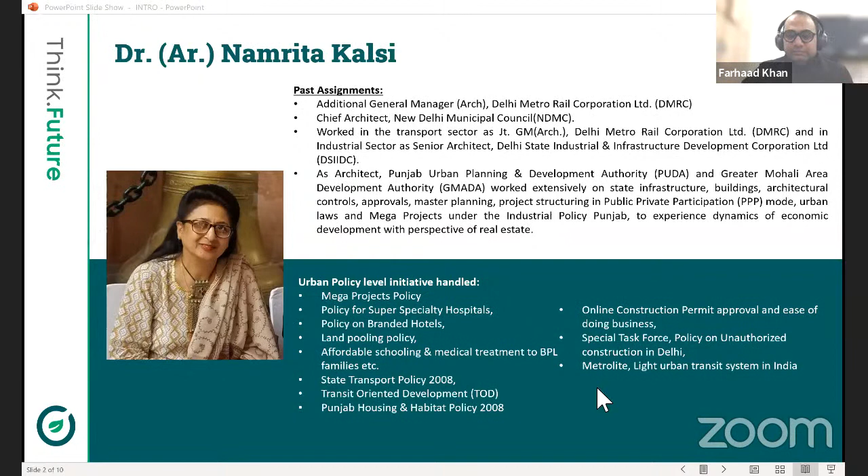Farhad, can I share the screen? Sure, ma'am, let me just share it. How do I convert into PPT mode, because my screen is not visible? Is there a command for that? F5, F5. Okay.

Thank you. Good afternoon, everybody. We are today covering leverage technology to design energy efficient buildings, an event organized by WinZero and Capricorn Technologies. Here I'm sharing the journey so far by Capricorn, which was formed by the merger of 4 companies, and it's evolving into RIB, and then further taking a step forward to get it to WinZero.

Now, what is WinZero? Before going to that, let's understand that Capricorn is India's leading design and construction management technology and solution provider for architecture, engineering, and construction. Their vision is to help customers unleash ideas to create a better world, with an end-to-end strategy and 360-degree technology solutions to customers through product sales. They have 20,000 plus customers and more than 250-300 staff.

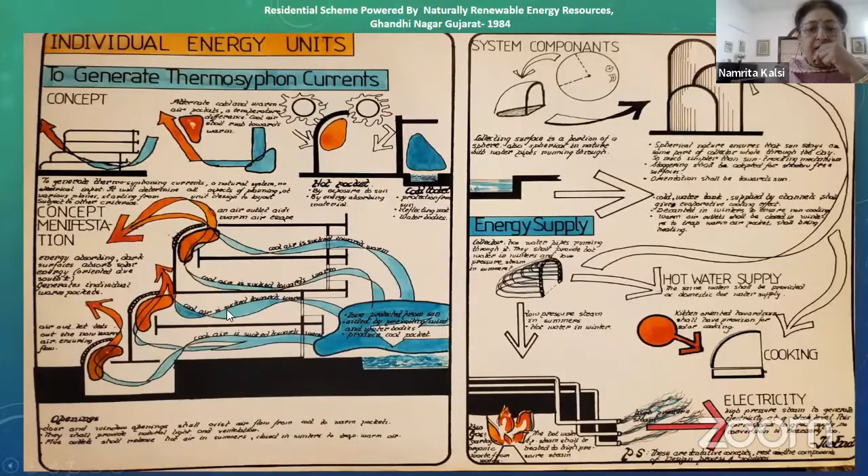This thesis looked more at sustainable solutions like hot water supply, cooking electricity through energy, as well as generating thermosyphon currents. As I see down the lane, these things are still relevant for rural sustainability in terms of solar cooking, biogas, evaporative cooling, solar water heater, and probably agriculture sustainability.

But when it comes to urban outlook, the thing is a different story, because the energy requirement and energy spent in urban areas is far larger. It takes a piece of cake. So some of the technologies which have to be looked at as far as urban areas are concerned is nanotechnology.

Nanotechnology mainly consists of the processing of separation, consolidation, and deformation of material by one atom or molecule. At present, many of the tiles available in the industry are coated with nanomaterials, and we find it very good. But these can also be leveraged to upgrade previous technologies by having multi-junction solar cells, quantum dot solar cells, nano paints, nano printables.

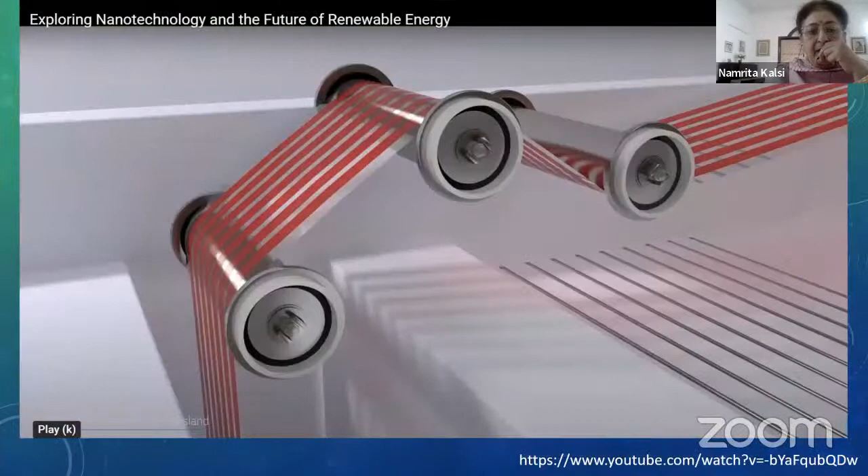As far as battery or storage is concerned, coating with active material for energy density, and next generation lithium batteries, and then even converting bricks into energy generation.

With this, I come to one of our speakers, architect Britta Knobel-Gupta, who was born in Stuttgart, Germany.

She will be sharing with us their experiences. Britta pursued her architectural study in Constance, Germany, and Lyon, France. She received a scholarship in 2004 to study MArch in Architecture and Urbanism, DRL, from the Architectural Association School of Architecture, London. In 2006, she joined Zaha Hadid Architects and was involved in a number of seminal projects as lead project architect, which achieved international acclaim: Abu Dhabi Performing Arts Center, Broad Art Museum in Michigan, and Dubai Opera House. She is also a professor at various architectural schools in Britain and Germany.

Her design philosophy fuses sustainability and computational optimization to create smarter, more ecologically sound solutions, blurring the lines between landscape and architecture and allowing nature to permeate within the built, which is a defining feature of her practice and can be reflected in her work.

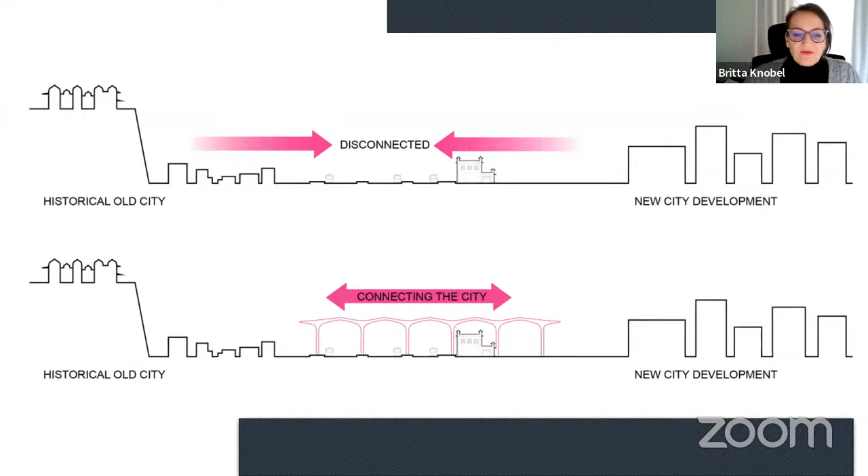So out of an urban perspective, we have the railway disconnected the city, the historic city and the new city development. So here with the station building, we really had a chance to connect the city again, which we of course wanted to use this opportunity to join both sides of the city again.

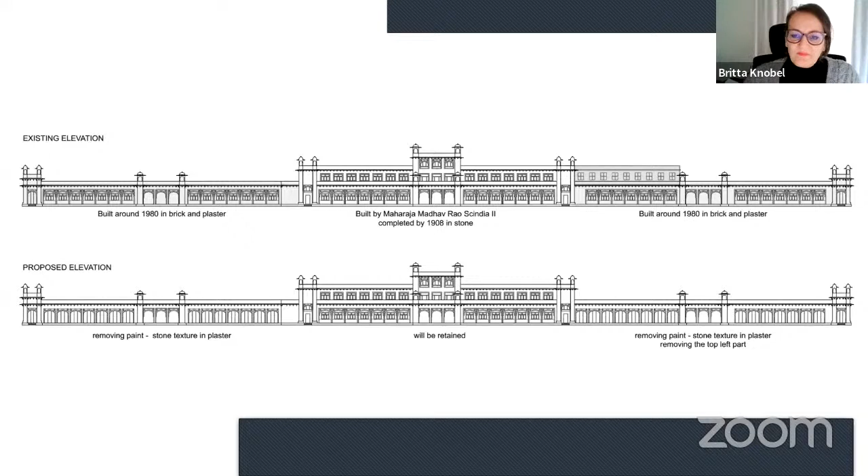So this is the existing building in the middle, 1908 in stone, and then they added later on these two wings on both sides, left and right, in the 1980s in brick and plaster, and they painted it. So for us, in terms of adaptive reuse, we decided to maintain the existing structure, reuse it, renovate it, and then flank it with the new departure and arrival terminal, which is a requirement from the Indian Railway to separate the flows from departure and arrival.

So we have a very clear distinction, a very visible terminal, departure and arrival. So it's very clear for passengers to know where to go. Same logic as any airport has to really separate the flows. And by adding these two terminals, departure and arrival, on both sides, we are flanking it and giving more appreciation again to the existing structure in the middle.

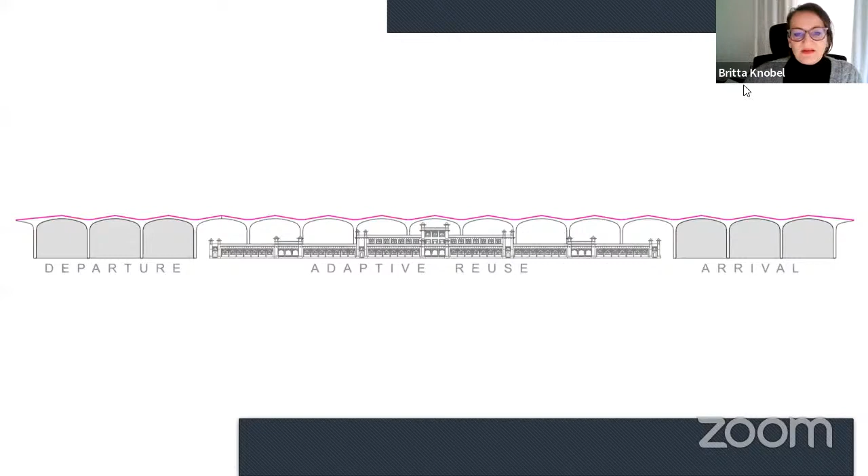So out of a two-dimensional structural system, which we found in the existing station, these arches, which was the most prominent architectural element around in this project, we were really trying to use this two-dimensional arch and develop it into a three-dimensional structural system.

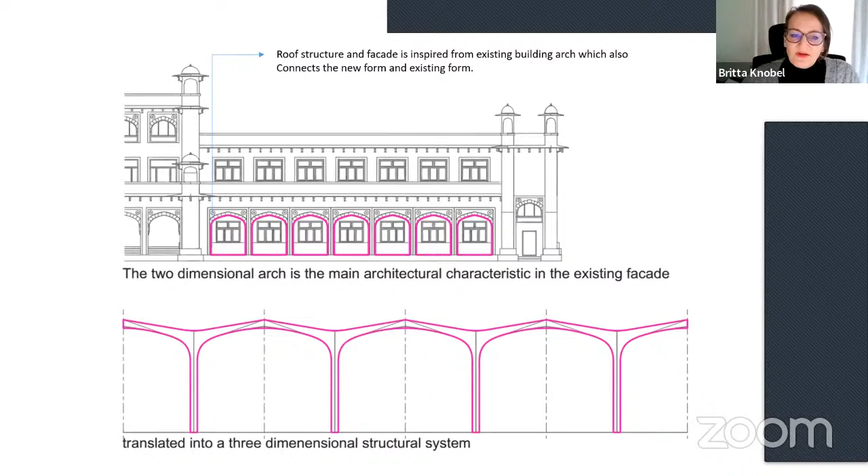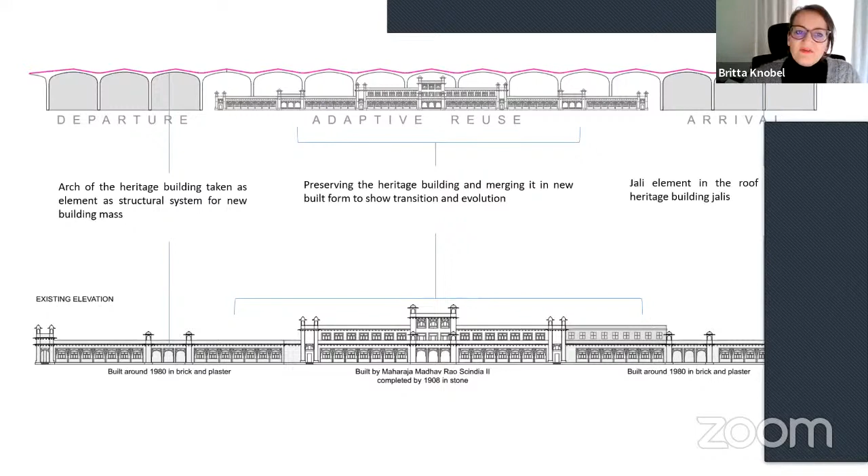How we designed it with this structural system, we designed the departure and arrival terminal and also the covering of the platform, which you see in the background of the existing structure.

This is the structural system with, of course, because we cannot shut down a running station, the columns have an in-situ foundation, but then the columns will be prefabricated, the truss systems, the slabs will be prefabricated, structural roof system will be prefabricated and built up as soon as possible with a running station in the background.

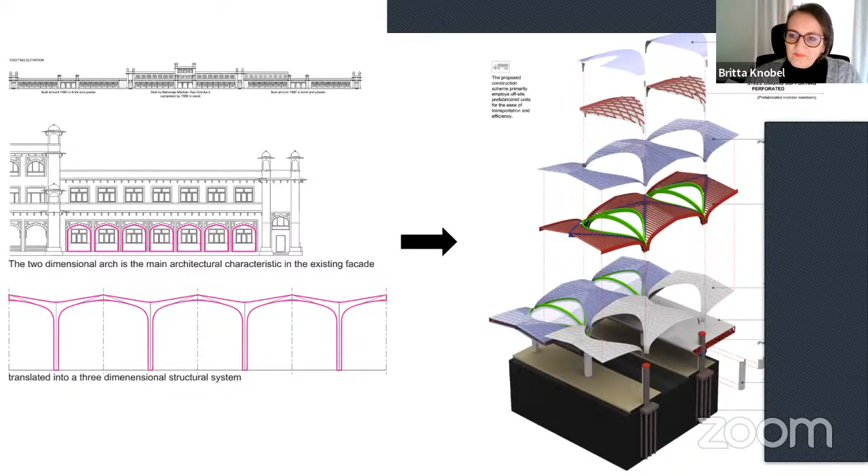It's a three-dimensional structural system where we added these eyes into it, with also a 'jali' to get some natural lighting into the platforms, and of course also to reduce the energy. It's also animating the space. We actually got the clue for this jali from the existing windows of the station, so we took that pattern and added it into the terminal project.

This is the extent of a railway project now, which the Indian Railway is doing a lot of in India. It's a whole master plan where, in the surrounding areas, we're adding residential, commercial, mixed use, various different programs which they will sell or lease out. At the bottom you see the new proposed station building.

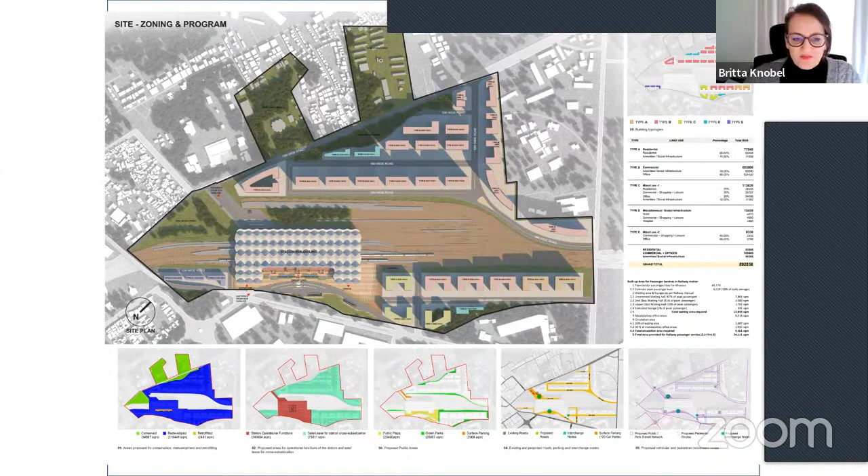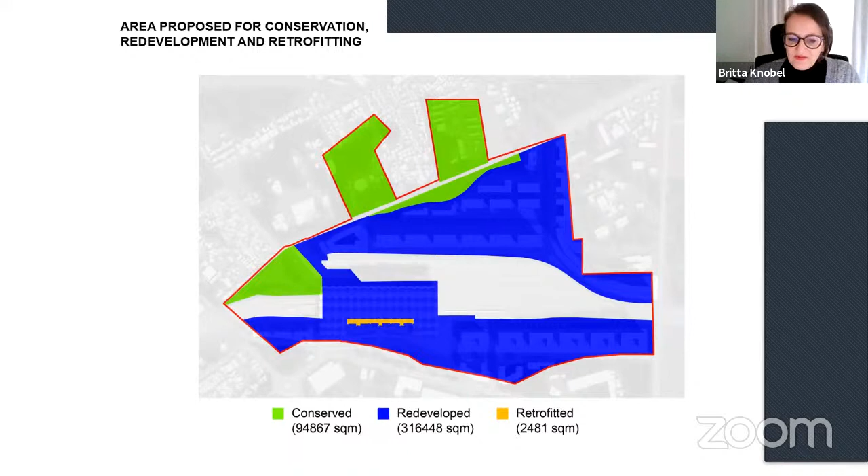Partly this master plan will of course be conserved. Some green areas will be conserved. Some areas, marked in blue, will be redeveloped. In this case, because we are retaining the station, we are retrofitting it, so we also have a retrofitting element.

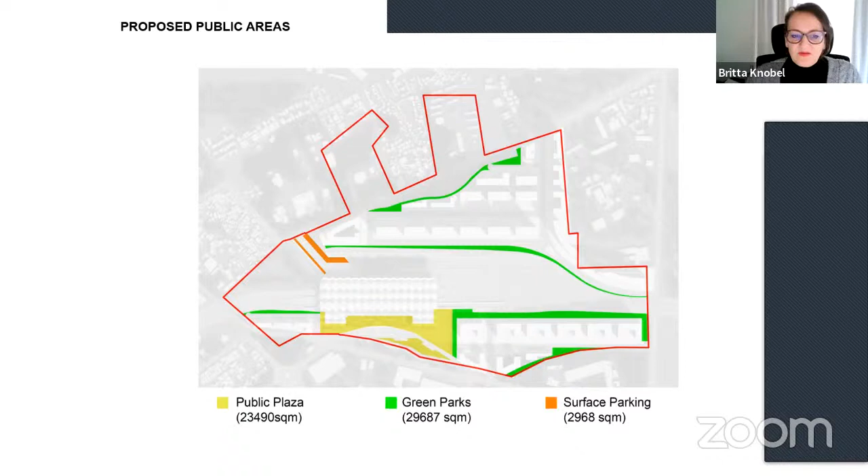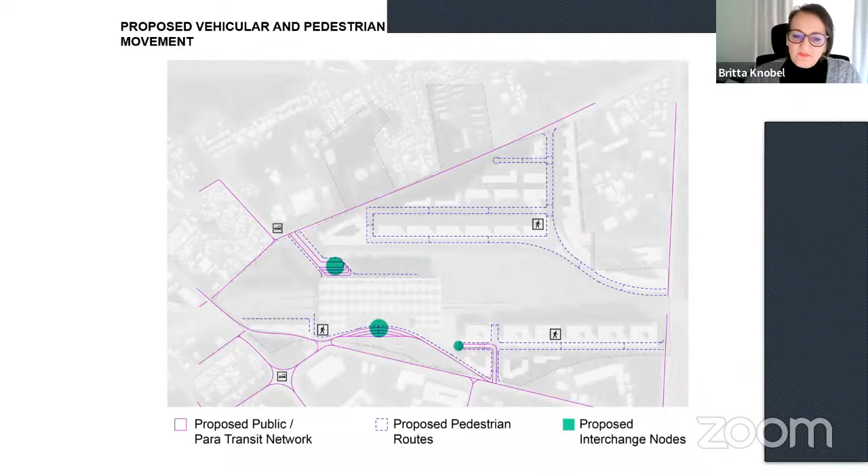This green area goes into sale and lease - some public plaza, some green parks for residents, commercial lotting, surface parking. This is the new road network and the new drop-offs, and also the proposed interchange nodes for various other modes of transportation.

The proposed road network and interchange nodes. Here you see again what I just mentioned, the various programs of commercial, residential, mixed use, which we are adding into the master plan to make it also viable for the Indian Railway.

The top view - we have a drop-off on the back side and on the front side, so two drop-offs when you come from any direction. You can use the closer drop-off, and from each drop-off you can enter departure and arrival separately. So it's never blending together - it's always separated, these flows.

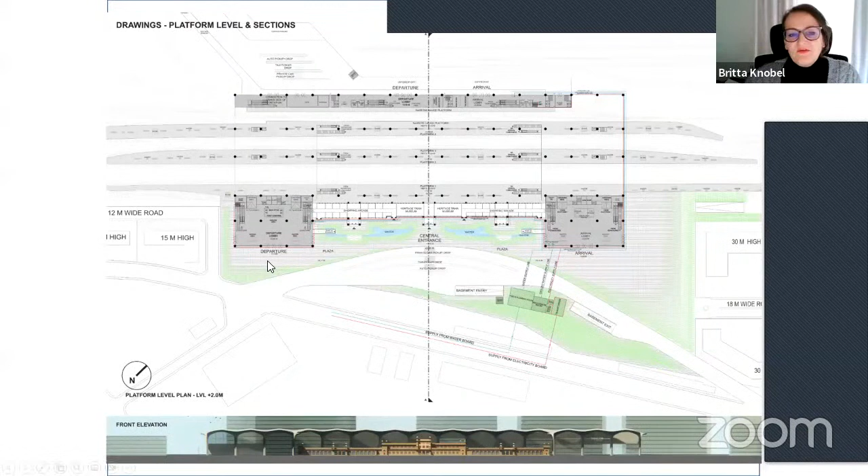This is the main ground floor drawing. If I zoom in, you arrive at departure, you buy your ticket, then you go up with the escalator or staircase to the concourse level. From there you can wait for your train, have a snack, have a coffee. You wait for your train to come, then go down the steps or escalator, or for handicapped people, there's a lift. So this is the logic - the flow is completely separated, arrival and departure, also very clearly visible from outside.

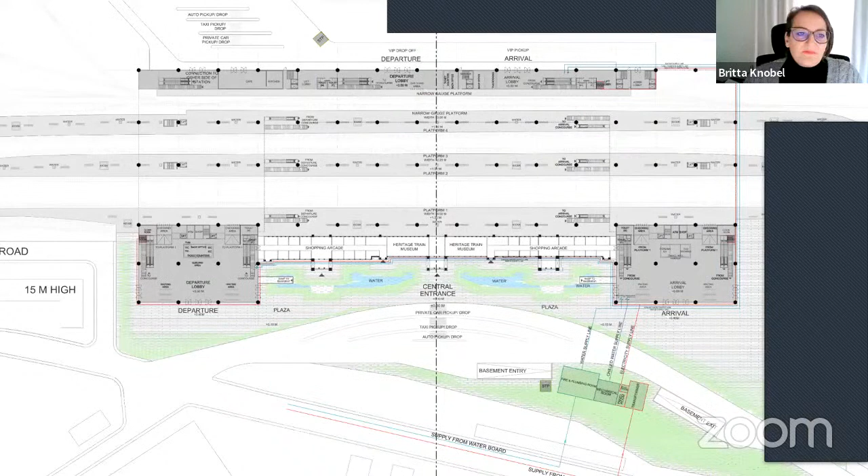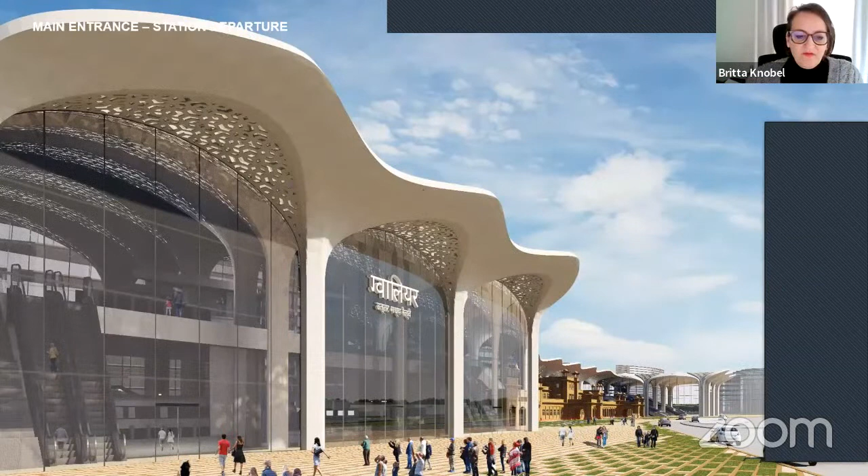I will show you the concourse level in a minute. So this is again the drop-off view, a view into the departure terminal, and on the right side you see the arrival terminal. This is the departure - you arrive, buy a ticket, then go up to the concourse level where you can relax and wait for your train.

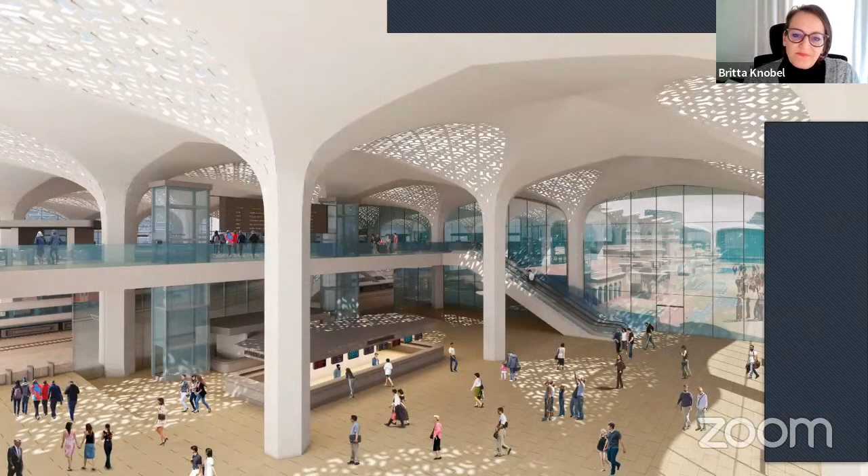You see here, these jalis give you some natural light, and here you see better - it's also animating the space because during the day it will move and animate the space. It gives a very nice differentiation to the space. And you see in the drop-off here, in the background, the original station on the left.

A view down from the concourse level after you've relaxed, when your train is approaching. Here you can go down with the staircase or the escalator into this large space. What I want to mention is, of course, the platforms are not in a regular grid, so the structural system is in some parts longer, in some parts smaller - the left platform is closer, the right one further. So it's a structural system which we developed that can be applied to these various platform depths.

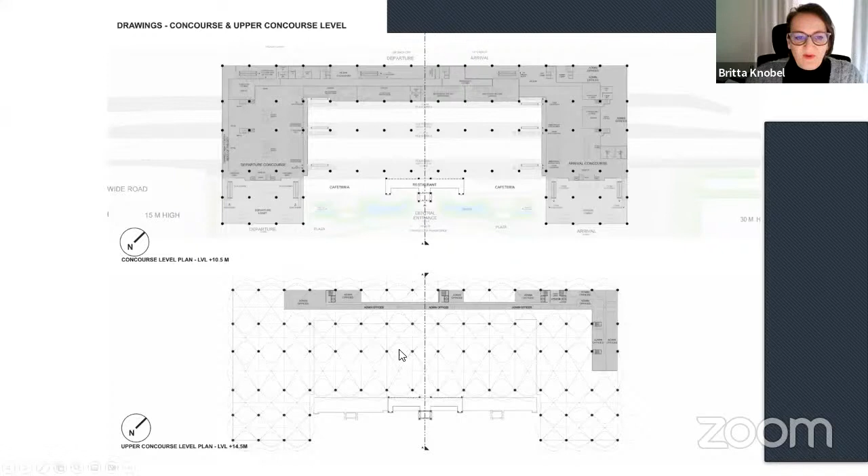So this is the concourse level in the roof plan. When you arrive in the concourse level, you have, of course, the possibility for waiting areas. You can have some refreshments, retail, and then there are some VIP lounges, some restaurants to make your journey a little bit more easy and relaxed.

And then here on the left, you see this corridor. Anyway, in reality this connection connects the old part of the city with the new part of the city. So this is the connection which we created as a possibility to reconnect the city.

The existing station building will be used on the ground floor as a small museum and shopping arcades, and on the first floor, as you can see, as a restaurant, where we are using these existing balconies.

When you arrive, it's the same logic. You go up to the concourse level, you can wait for your next train, or maybe you just want to leave. Then you go down, escalator or staircase, and you can go back to the drop-off and get picked up with your cab, car, or bus.

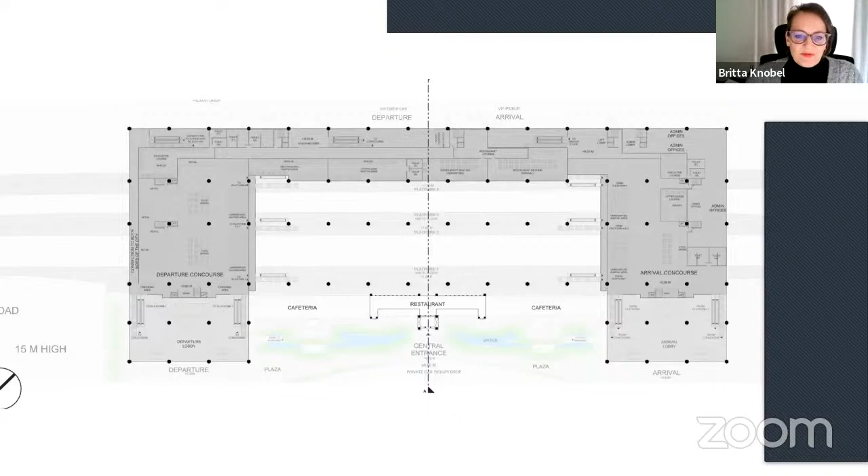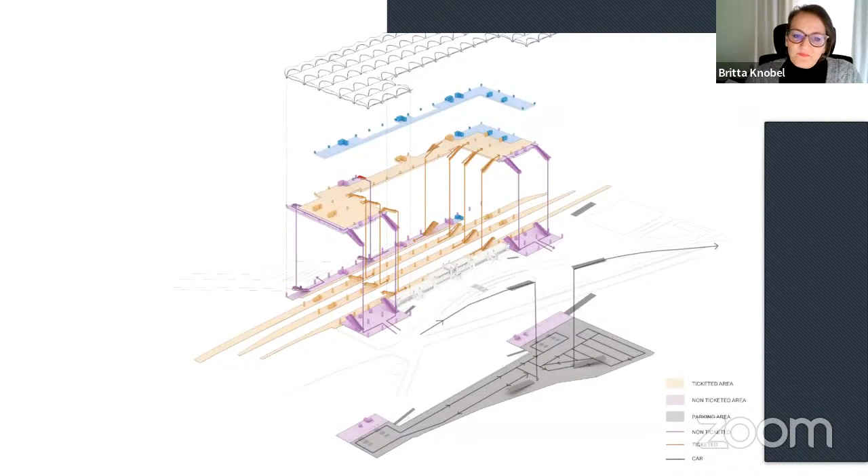This is the view of the concourse level down into the platforms. Here you see the ticketed area, non-ticketed in purple and ticketed in orange. So after some point it is ticketed, and the lobby is non-ticketed.

This is some more fire escape and vertical transportation. This is again the structural system, and you see here in the middle the framing plan with different grids. Because of the existing platforms, we have a different grid which the structural system can manage.

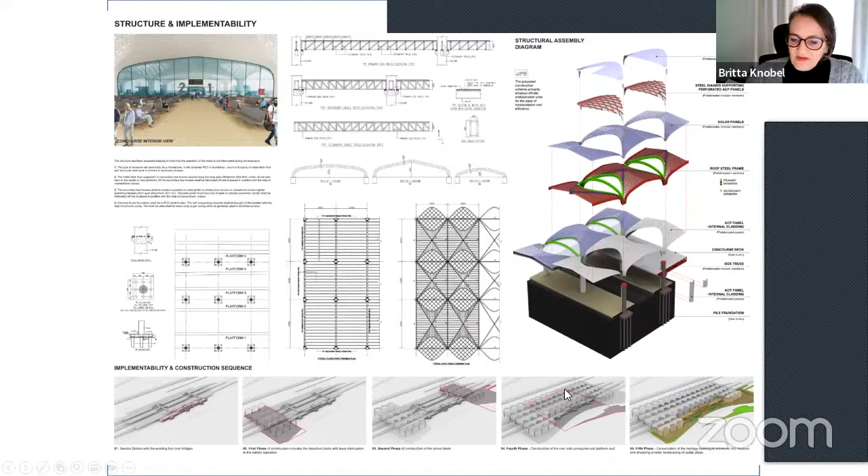We are proposing to do it in stages: first the departure terminal, then the arrival terminal, and then the central area where the renovation and drop-off will be going on. It's all prefabricated, so it will be quick to install, as quick as possible.

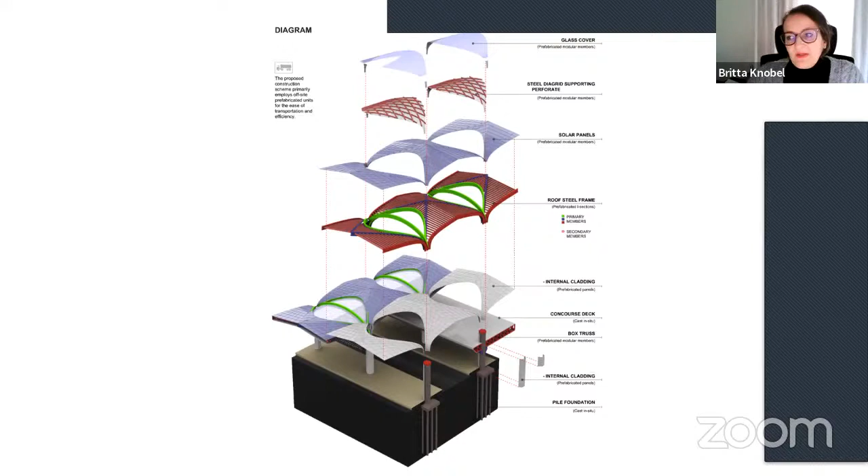We are also proposing on this roof, because it's a very large area, it's ideal to put photovoltaic cells on the roof. So we are proposing photovoltaic cells to also make it net zero, maybe even net positive.

So this is the structural system. You see here 32, 25, 28 - it varies depending on the platforms.

This is a small movie.

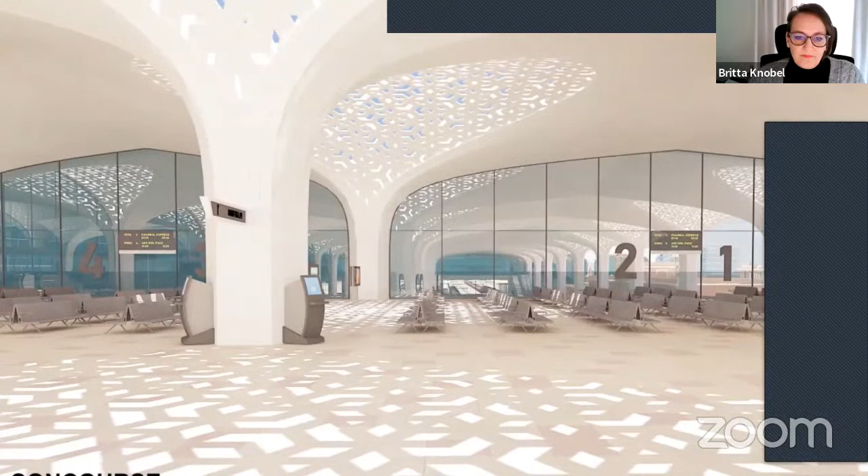So this was an international competition which we won. This is actually the panel which we gave for submission when we presented the project.

We have various elements besides the photovoltaic on the roof. We are proposing natural ventilation, passive cooling, some misting, and water saving fixtures. Also, an interesting element is piezoelectricity on the plaza - these are tiles which create energy, an active slab. So you see, we have various elements to make it really a net zero project.

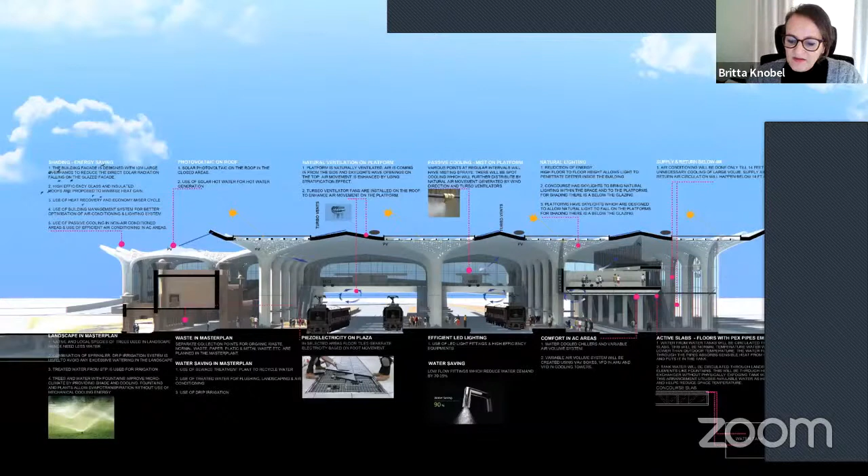This is the overview of the whole master plan.

We would like to show you one more project, which is much smaller and also looks at sustainability in very global and very large ways under a very large umbrella. Here we are looking at the climate, responsiveness to the climate, and also locally sourced materials.

What is very special, I think, is that we are nesting villas within the earth to use the earth cooling. We are reducing direct heat gain by doing that, and also using the wind movement to cool the spaces. So I want to quickly run you through this.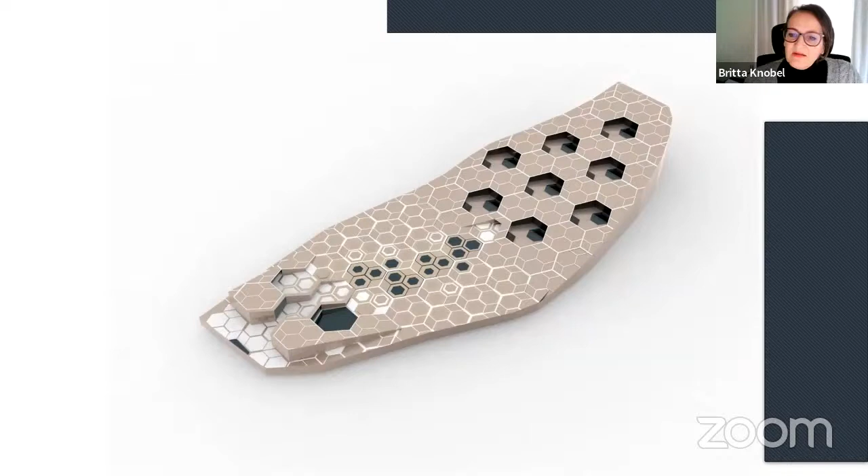Additionally, it gives us very private and introverted courtyards. You feel private in your own cottage, which is important - nobody looks into it. You have your private space, which you can enjoy.

On the left, we have the drop-off. There we have some buildings like a restaurant, all-day dining, and a reception area. Then we have a swimming pool.

Then you walk over the central area, which also has some water elements to cool down, using evaporative cooling. And on the right side, you see the villas nested in nature.

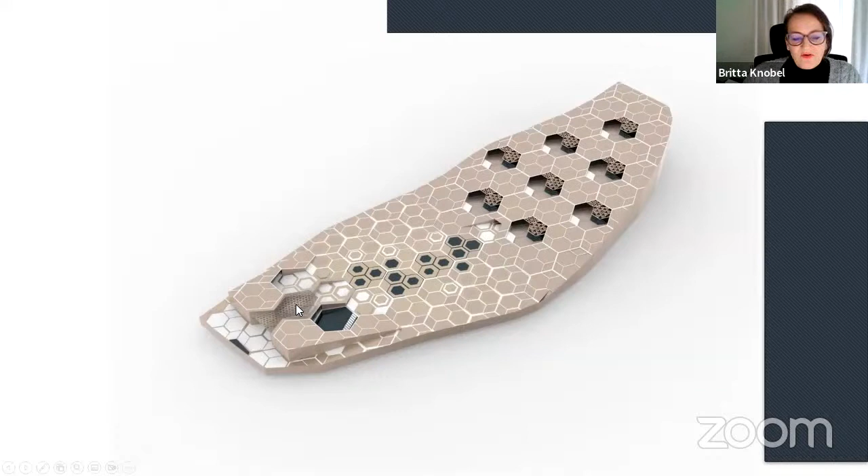On the left, after you drop off, you also have shading because it's extremely hot. Actually, the wind flows in this direction, so it also helps us - we channel the wind, it goes over the water bodies, and then blows over the cottages. By using these jaalis, we're actually getting the wind inside the courtyards, which I'll show you in a second.

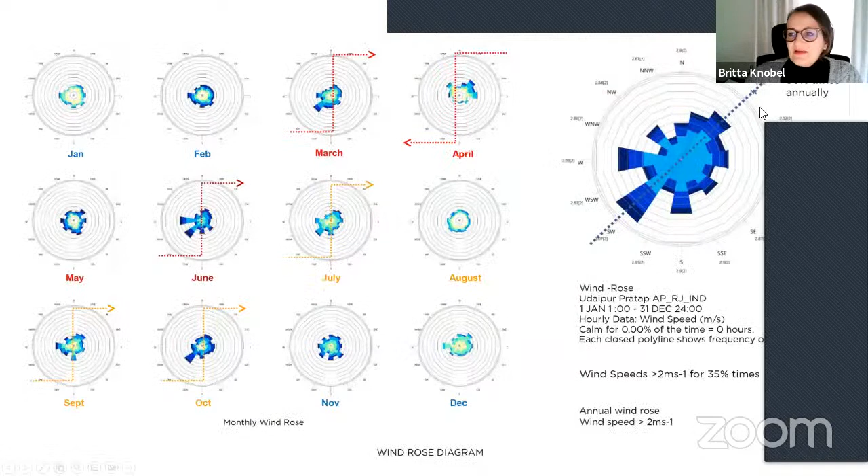Of course, we are also using these jaalis to shade the courtyard, or partially at least. This is the wind direction - luckily it just goes linear over the site, so we're using this wind direction.

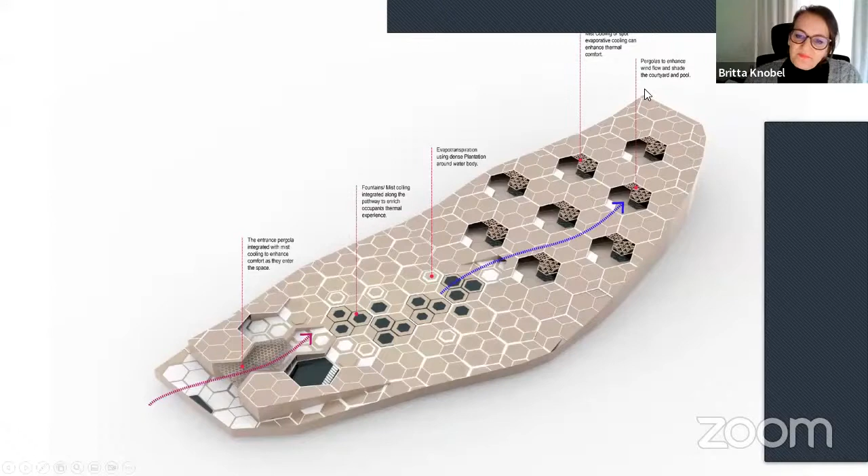I'll just show you this in a diagram. This is the view of the entrance of the cottages.

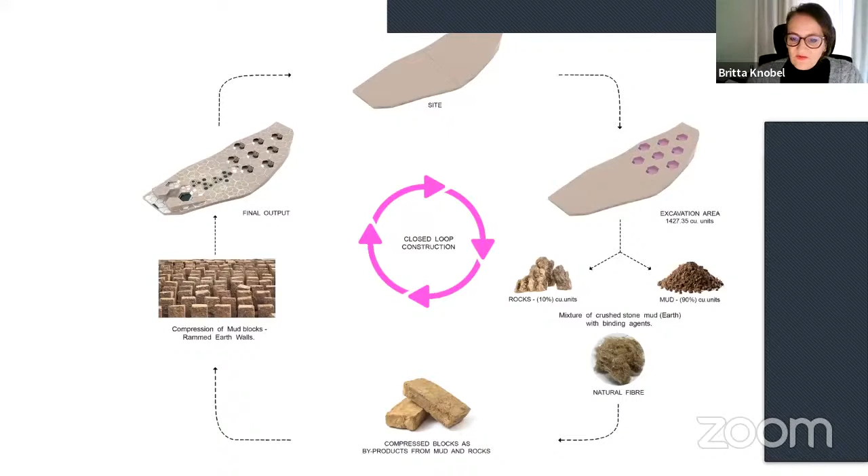So we have these 9 cottages. What is also important for us is to look at the closed loop construction, using whatever we get from the site. Here, the excavation mud is used to make mud bricks. This is a very important point in sustainability.

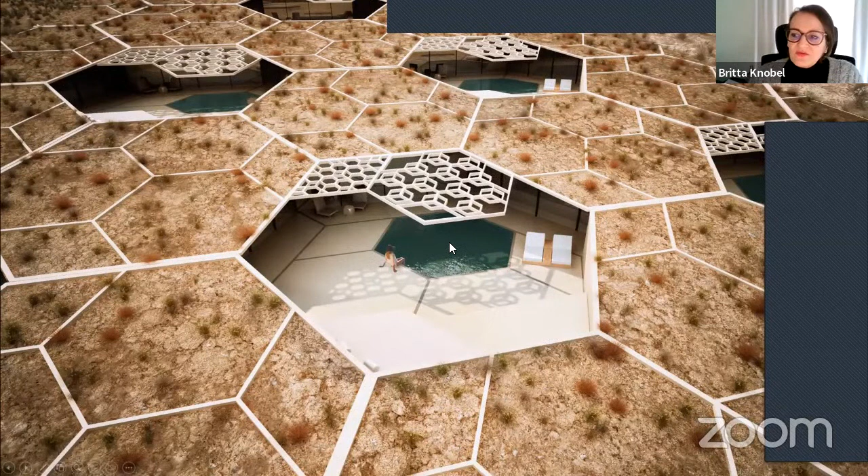This is a close-up view of these nested, cocooned villas with a day bed, and a close-up with a little pool and shading. This jaali was quite important to us because it has two roles: it provides shading, and it also lets the wind go in. Because of the inclination, it enhances the wind flow and brings it inside the cottage to reduce heat gain and cool it down a little more.

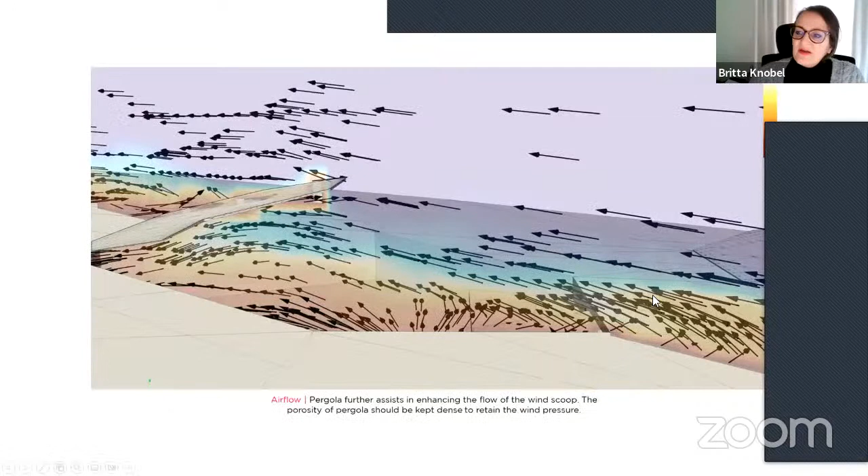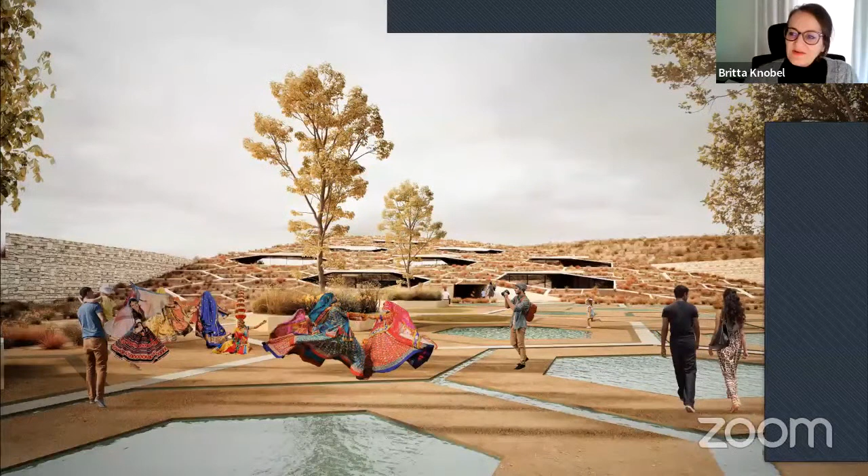With this, I would like to thank you very much for inviting me. I'm very much looking forward to your questions.

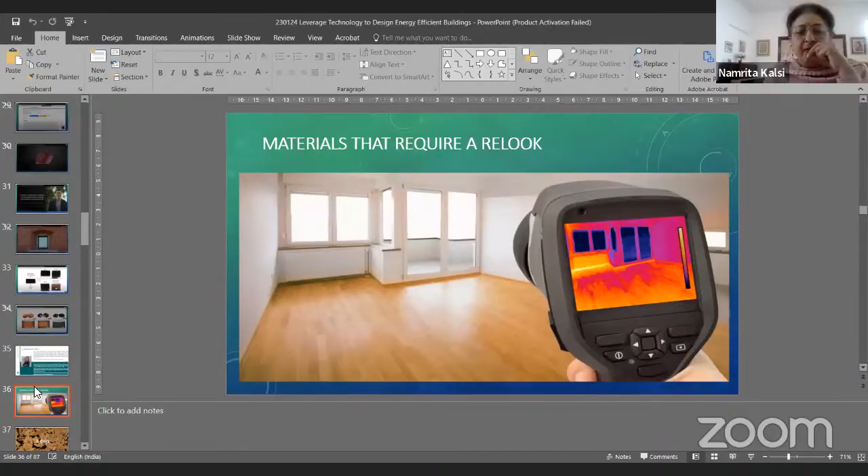Before that, that is Mili. Before that, Just a sec.

I would just like to remind my audience that some of the materials which we have thrown into the history dustbin, but which need to be resurrected for better sustainability, are cork, coffee husk, newspaper wood, mycelium, alga, recycled diapers, cob, plastic bricks, polyurethane, plant-based foam, and seaweed.

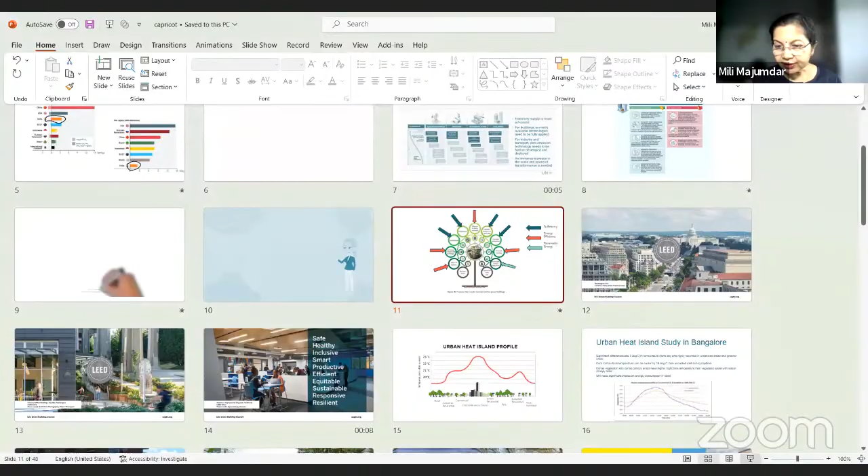In this respect, let me share my screen to talk about a few things. I know we are pressed for time, but I've just pulled up the presentation, and I'll go from the middle since we are pressed for time.

When we look at a sustainable or energy efficient building, we look at multiple things, not just one thing. For example, to make an envelope energy efficient, we have to look at passive design, which includes orientation, energy efficient envelope, window to wall area ratio. And when you do that, you look at daylight integration, shading devices, and several other low energy cooling and other things to be put in place.

A technology solution helps you optimize all of it and take design decisions that are cost effective and will give you the desired output in terms of energy consumption that you are seeking from that project, or moving towards a net zero solution. Since today we are talking about net zero, I would like to say we should first explore the passive options and the technology options that help us achieve energy efficiency, and then move towards net zero through application of renewable energy technology.

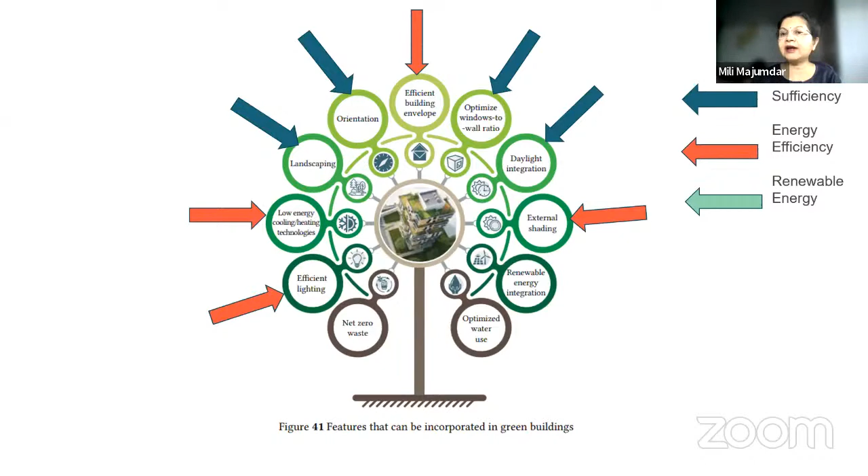This is again enabled through different processes. We operate the rating system called LEED that helps us optimize these solutions and leverage technology heavily to arrive at net zero solutions.

Quickly, when you talk about different scales, at an urban scale there are so many things you can address which you may not want to address at the building level. For example, we know this phenomenon of urban heat island, which is due to extreme urbanization. We have also done a lot of research studies showing how urban temperatures are increasing, and hence there is an increase in energy loads in buildings.

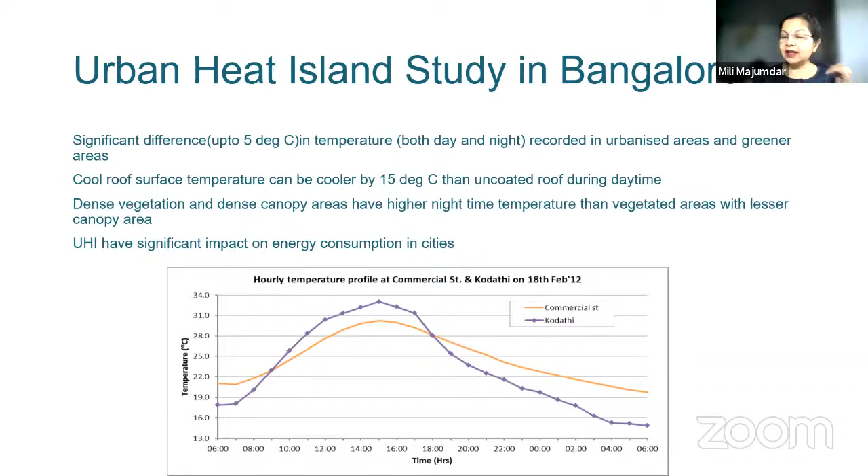You can also use large urban scale solutions. For example, this is an urban scale solution where you use urban heat island mitigation strategies in terms of urban agriculture, which not only provides food security but also helps arrive at lower urban temperature, which helps reduce the air conditioning load of a building. Again, it's possible to estimate these through use of different tools and techniques.

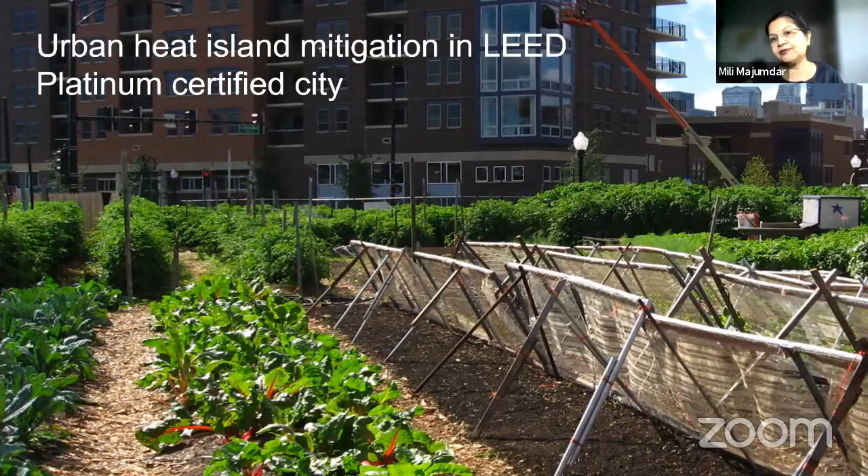We know the city of New York has a very large cool roof program, and this is one example of a certified building where a green roof not only provides the desired moderation of temperature below, but also gives a very nice open space for people to interact and take advantage of.

Technology also helps us deal with cross-cutting issues. For example, as soon as I talk about green areas, the obvious question is, where does the water come from? There are many places that are water-starved. So this energy and water nexus can also be facilitated through different tools, techniques, and technology.

This is one of the cities certified to LEED, which is Albuquerque, where the green spaces have been done using drought resistant native species so that you do not use too much water.

Coming specifically to building again, as I mentioned, passive architecture plays a very major role. We know that in India we have 5 different climate zones, and we should design for that climate so that we do not overuse air conditioning or other energy consuming guzzlers before we adequately leverage passive technology.

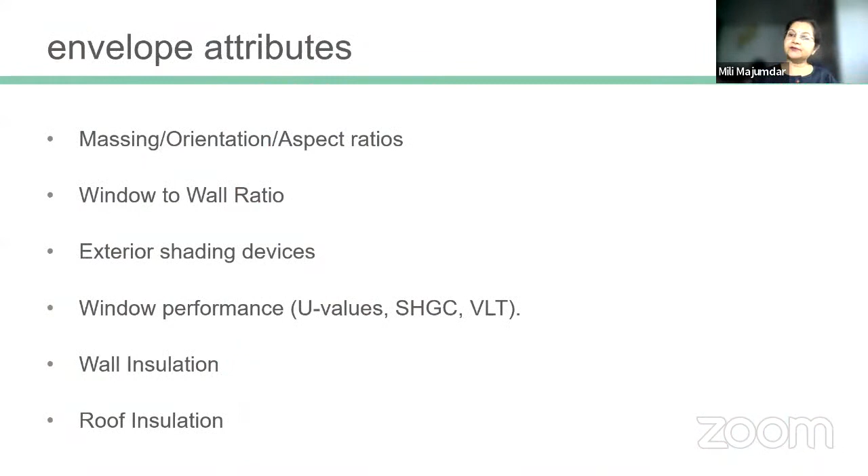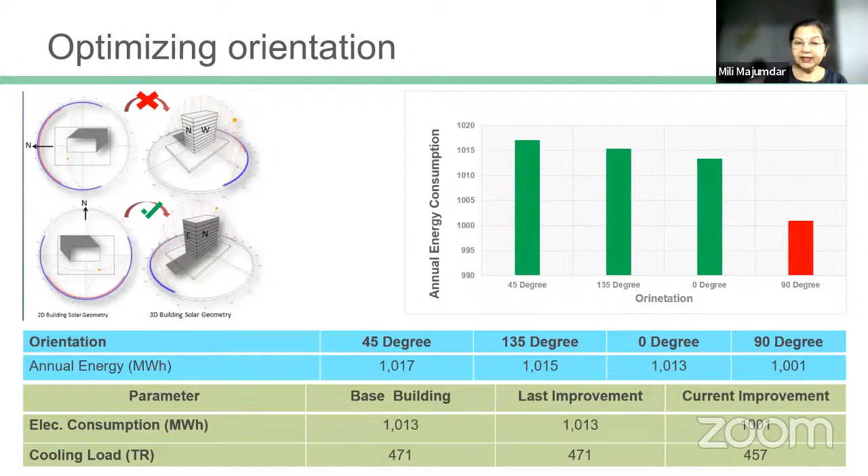For that, we use different modeling and simulation techniques to arrive at optimum design solutions. How do you do that? Through different simulation software and tools, you can actually find out how much the building will consume before it is constructed. So what would be the best orientation? For example, suppose you rotate the building in the simulation plan, and you will be able to find how much the cooling load of that building will come down.

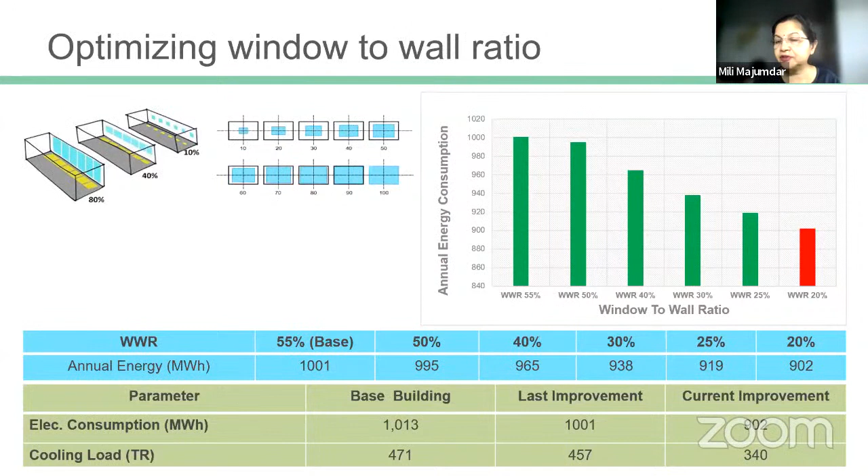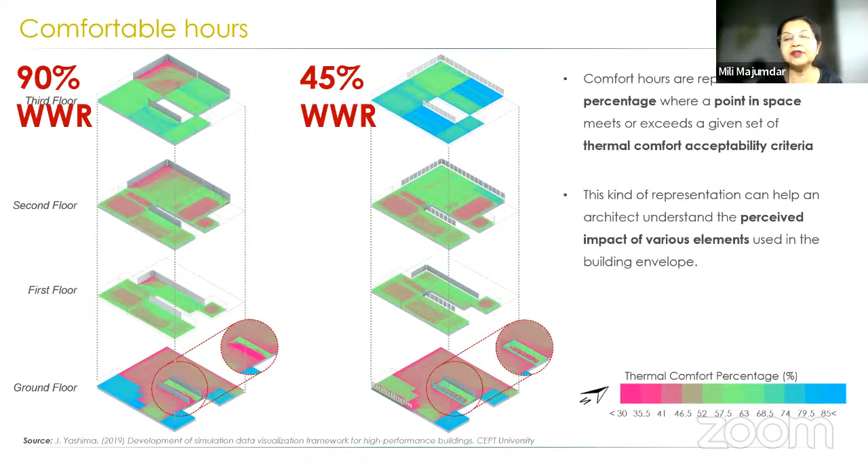If you reduce or increase the window areas, you will be able to estimate how much energy savings will happen. When you do a window-to-wall area optimization, you do not lose sight of things like daylight optimization. Simultaneously, you also look at issues of thermal and visual comfort. So if you are looking at an integrated solution, leveraging technology is very important.

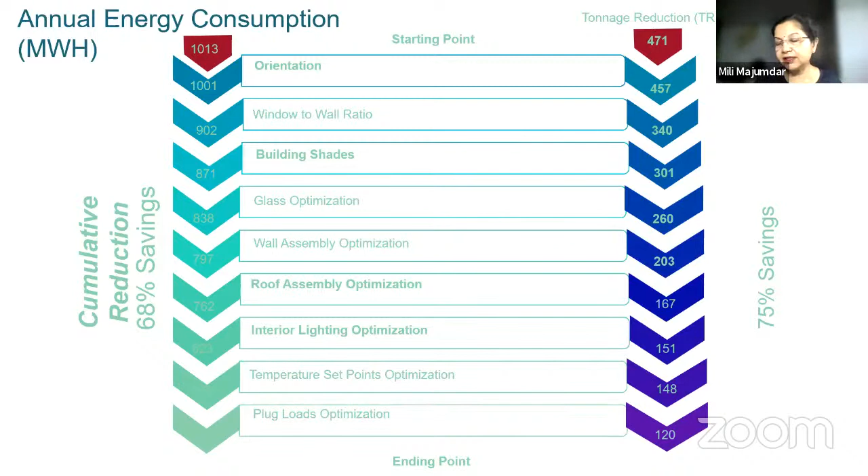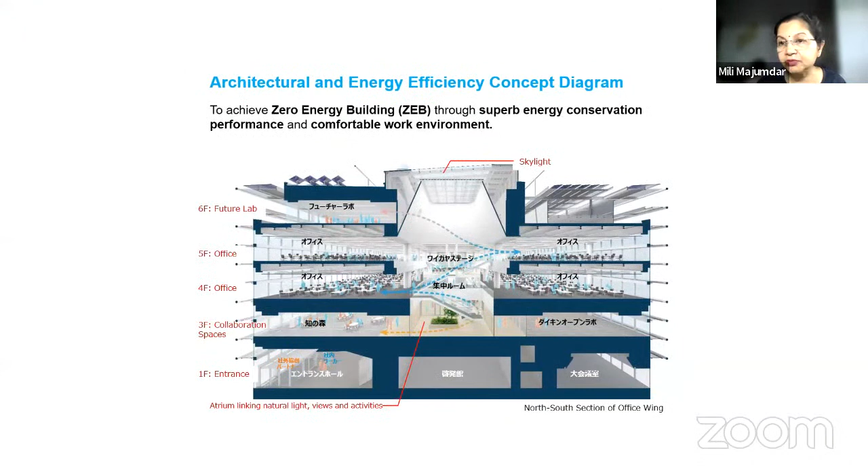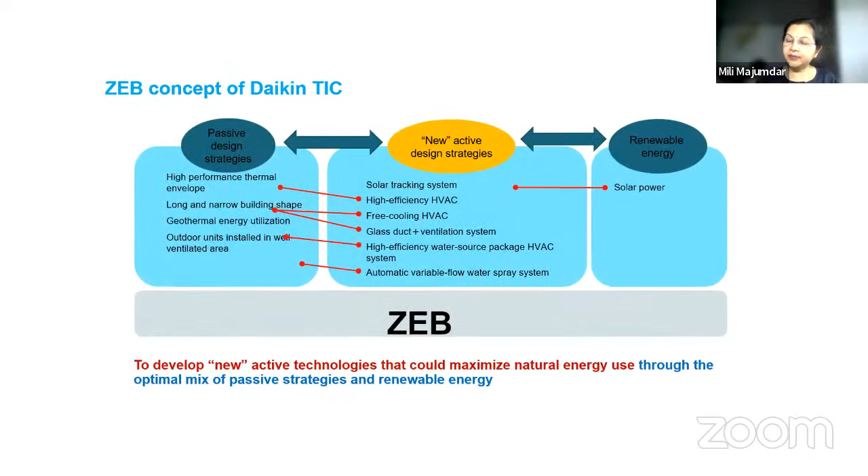And we have found that through this technology adoption, you can actually reduce up to 50 to 60% of the energy from the base condition, which is otherwise not physically possible to reduce if you are just doing these things manually. We have enabled several such projects through LEED certification. This one is a net zero building in Japan, which has heavily leveraged passive techniques, daylight integration, as well as other techniques like geothermal, before adopting renewable energy techniques to arrive at net zero solutions.

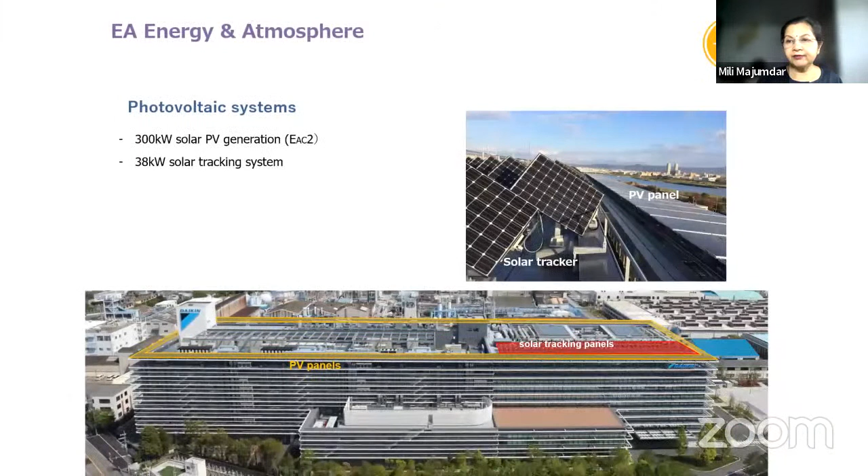Let me stress on the word maintain. You can design it at net zero, but you have to maintain it at net zero. One of the important things they mentioned is occupant behavior — people inside the building, which is designed as net zero or energy efficient, have to be equally responsible to maintain it at net zero.

So I just want to conclude by saying that it's very important for us to look at different streams in how we arrive at net zero, be it embodied energy or operational energy. But finally, it is very crucial for us to have people inside the building to be equally responsible for being net zero and energy efficient. I'll take a pause here, and I'm happy to answer any other questions you may have.

Thank you, Mili. I think the second question will help many of our architects and civil engineers understand how rating and certification steer projects towards sustainability and mainstreaming.

When you go through a rating system, you put everything together through a framework. As we know, what you can measure, you can manage. If you're not able to measure or quantify things, you do not know how green it is. So a sustainability framework or certification program gives you a list of parameters for your building or urban scale project to follow, and then you can say whether you are good, bad, or better than the best. That is a big thing that sustainability certification programs help you achieve.

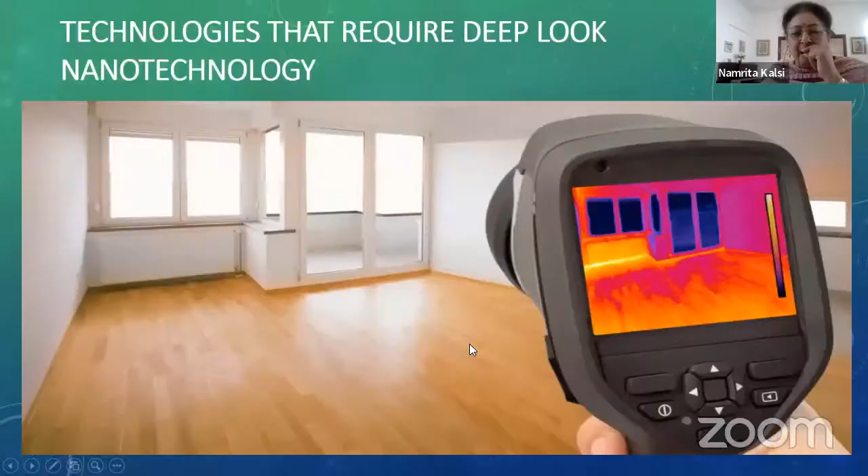Sorry, when I press F5 it goes back to the first slide.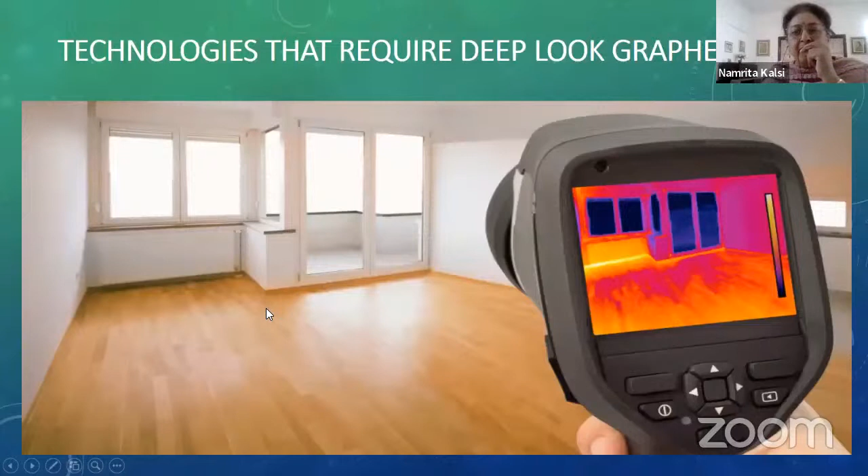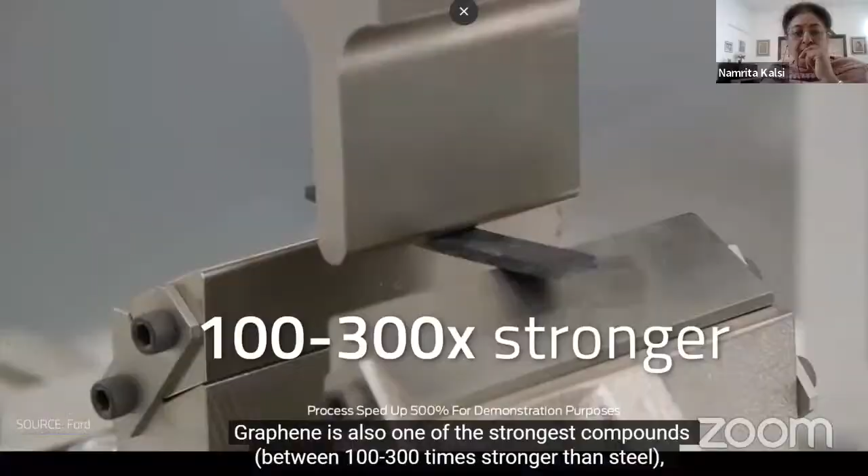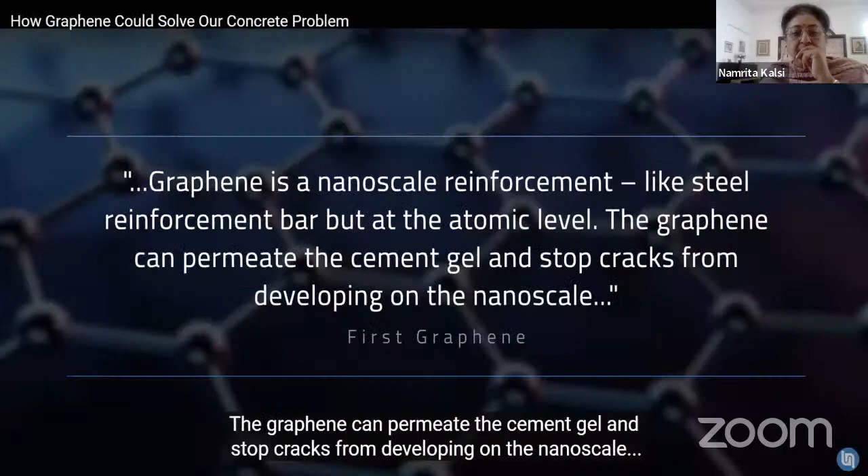Another technology and material that really requires a deep look is graphene. Graphene is a form of carbon with a molecular bond length of only 0.142 nanometers. If we stack several layers on top of each other, we can turn it into graphite. It is a very strong material that can be leveraged greatly for lowering electricity cost. If we add it to concrete, it can bring down the emissions of concrete. However, there's a lot of gap in bringing this material from lab to ground. Electrochemical exfoliation is one of the methods being looked into to create large quantities of graphene.

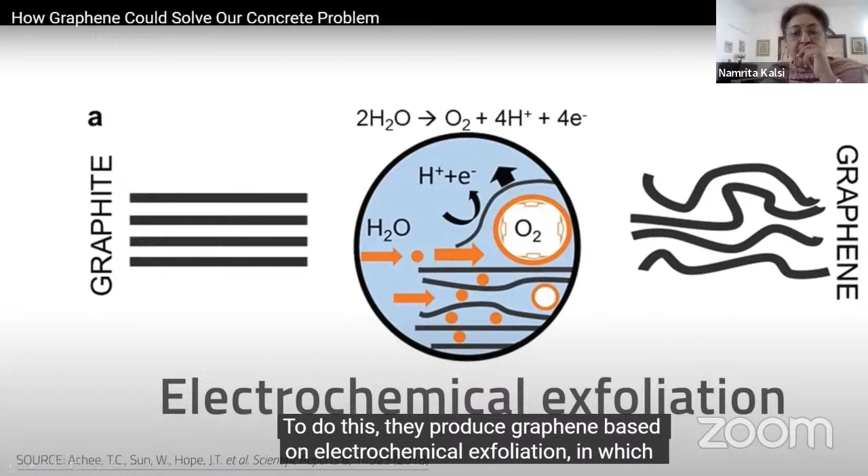So here we have Mr. Sunil Malik, who is part of the original Revit team and joined Autodesk when Revit Technology Corporation was acquired in 2002. He holds a large variety of business development, sales development, strategy, and technical positions at Autodesk and Revit. Mr. Sunil represents Autodesk at different architecture, engineering, and construction industry forums. He has been involved in evangelizing BIM across Asia Pacific markets since 2001 and has worked with various government agencies driving BIM mandates as well as with various large private organizations. He has been a key player and spokesperson for delivering smart cities and sustainable vision for Autodesk. We would like to pass the mic to Mr. Sunil so he can share his experience in this direction, especially with respect to Autodesk.

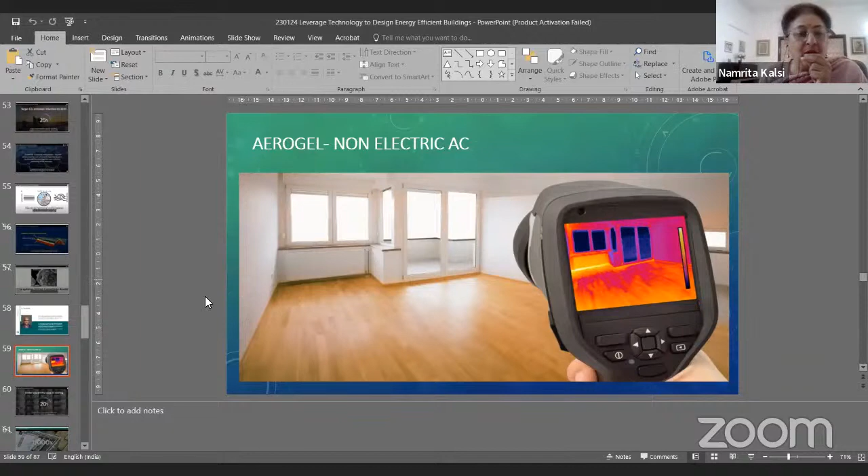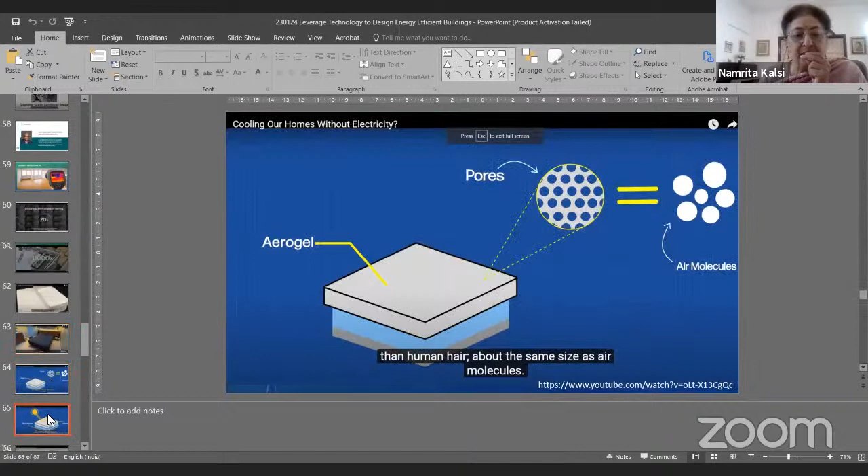Aerogel is another material which helps us achieve cooling, a non-electrical AC. It's like a bed in a room with 3 layers: top is aerogel, bottom is a mirror-like base, and in the center there is hydrogel or water. With the help of this, we can achieve cooling with savings in electricity.

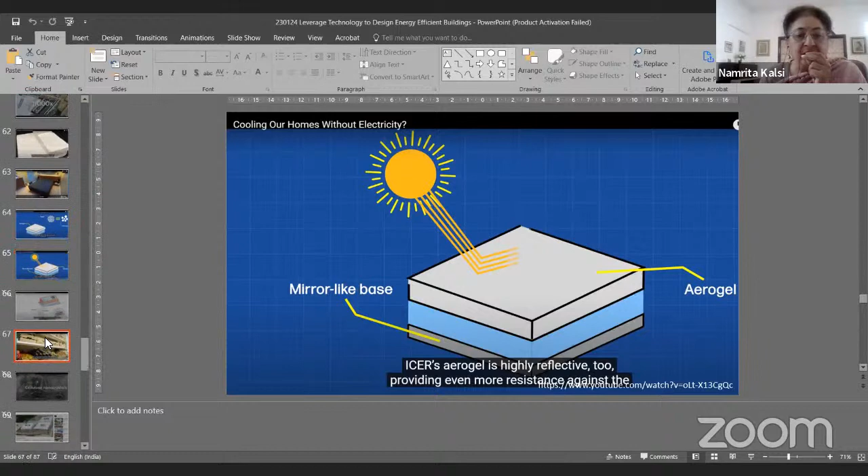The same material can also be used for increasing the shelf life of vegetables.

Similarly, glass is a material now used in all modern buildings, the so-called IT buildings in urban India or the world, but it lets in natural light and loses a lot of energy. So that's a paradox we have to deal with. But there is a transparent form of silica aerogel being produced which, with the advantage of light, can also save energy.

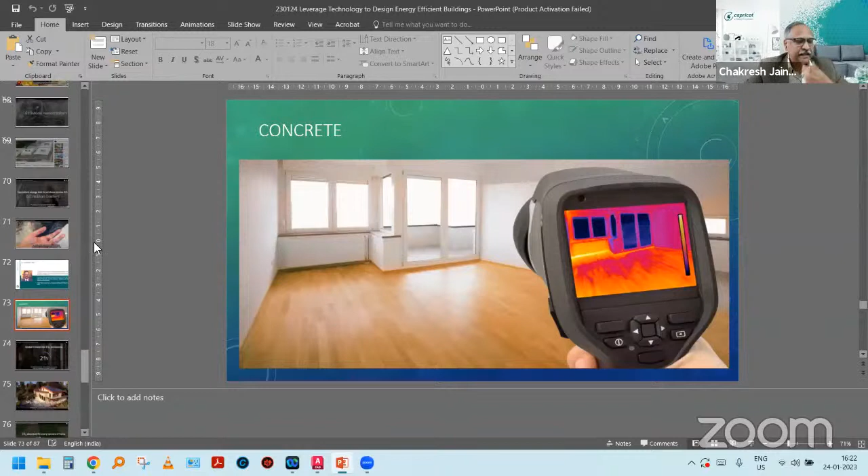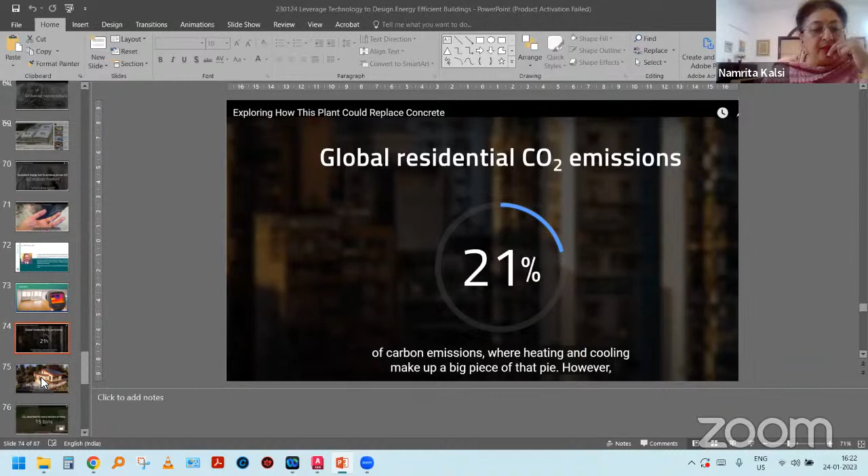With that, we come to another form of concrete, because concrete gives 21% of global residential CO2. But there's another material which is saving a lot of energy, and that's hemp. Hemp is a little controversial, but it has fantastic fibers, and almost every hectare of hemp absorbs 15 tons of CO2.

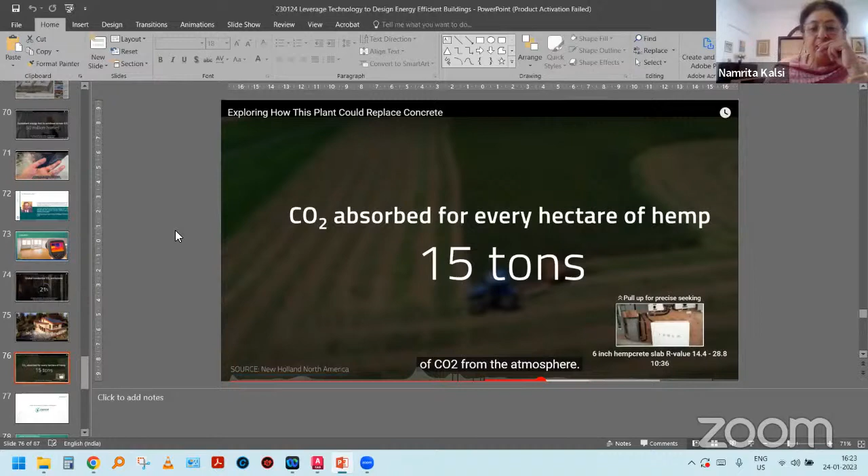I think somebody asked how local people can get benefited from this project. I assume you meant the station project, whether it's indirect or direct. I think definitely it's direct, because you are affected directly as a traveler - it will make your traveling a bit more hassle-free if the departure and arrival are separated. I think this is what you meant, so yeah, definitely it's direct. It's also indirect, because globally a new station building will also give more value to the city, so I think it's also indirect.

If this project helps in preventing economic leakage, if I completely understand, I would say this is a redevelopment. Indian Railway is using the master plan, these buildings, plotting for selling and leasing, not to gain money but to gain funding for the station. So yeah, you could say it is a diversion of funds, I guess, if this answers your question, hopefully.

Then I saw there was one about vertical gardens, which maybe is also for me. The question was, will a vertical garden make the building more green? I think definitely it makes it more green, literally, but it also absorbs CO2, reduces the heat island effect, reduces temperature, and can also provide shade. So it can have a lot of benefits.